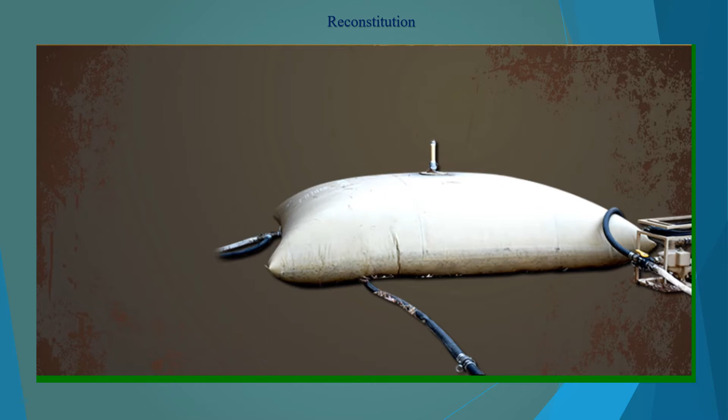When the ROWPU is going to be shut down for 72 hours or placed into storage, you will have to follow the steps listed in Work Package 9 of the technical order. The first step is to create at least 2,000 gallons of dechlorinated product water and store it in a bladder. Do this by turning off the chlorine feed pump and continue normal operations until you have enough water, then perform a short-term shutdown.

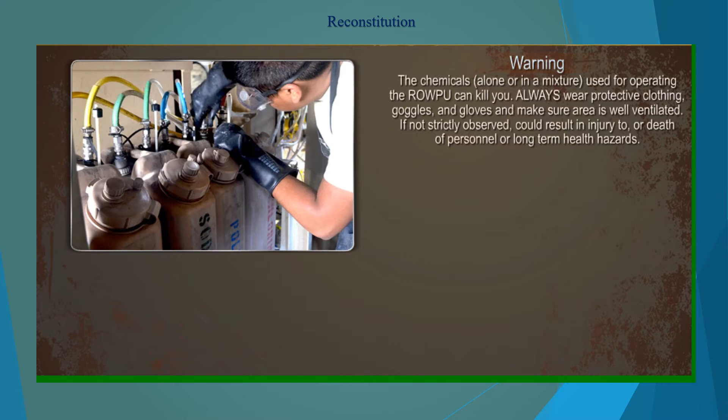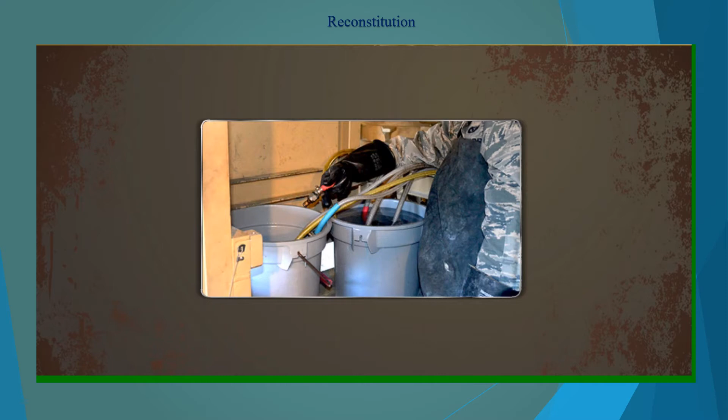Disconnect the suction feed and return lines from the chemical feed cans and remove the feed cans from the rack. Dispose of the excess chemicals in accordance with unit directives. Fill a pail with clean water and place it on the rack. Place the suction hoses into the pail. Place the return hoses into an empty pail on the rack.

Turn all run-prime valves to prime. Depress the chemical feed start button and adjust the stroke and speed to maximum. When the pumps are primed, switch the valves from prime to run and run for 5 minutes. This removes all the chemicals from the hoses, valves, and pumps.

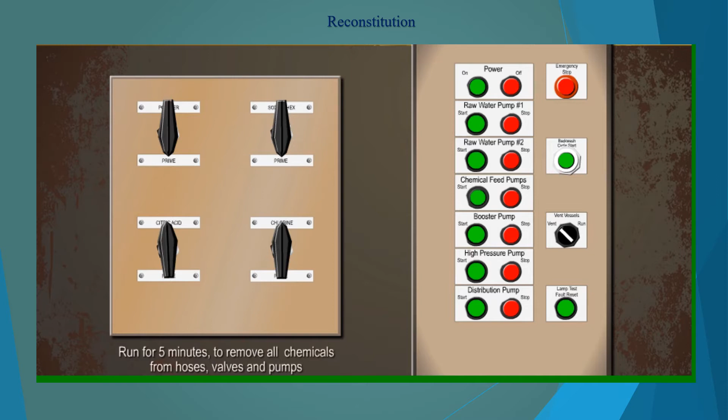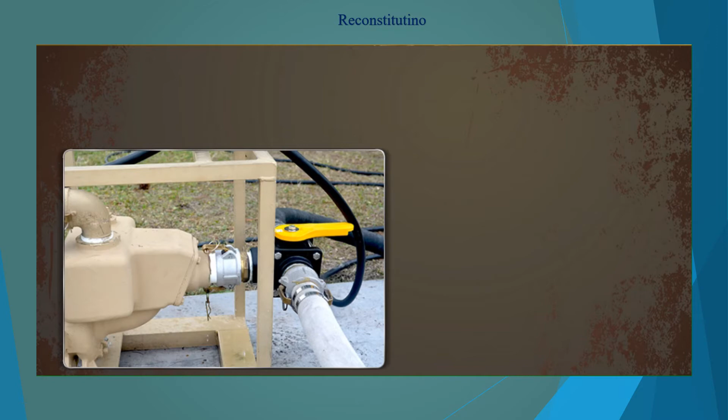Switch the valves to prime, remove the suction lines from the pail, and run the pumps until no water is discharged from the return lines. Turn off the chemical feed pumps and install the dust plugs and caps on the feed cans and hoses. Secure the chemical feed cans back in the rack.

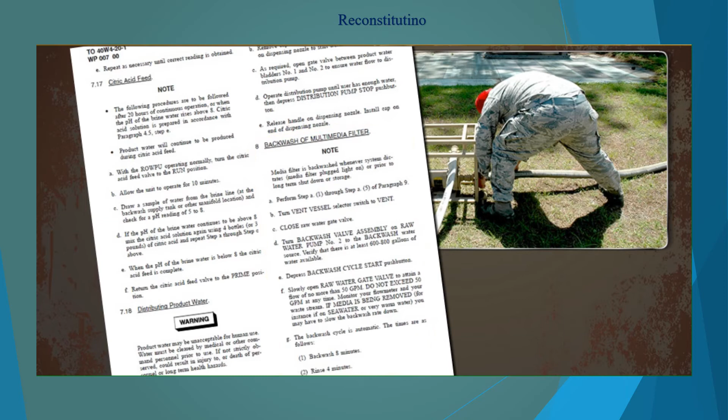Reconnect the intake hoses from the raw water pump and backwash water supply to the dechlorinated product water storage bladder. Perform a backwash of the multimedia filter following the steps listed in paragraph 8 of Work Package 7. Once the backwash cycle is finished, return the ROWPU to normal operations.

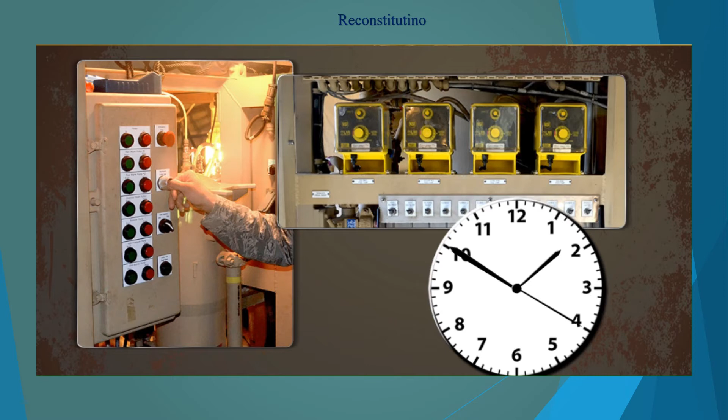With one exception, you will not turn on the chemical feed pumps. Using the dechlorinated product water, run the ROWPU for 10 minutes. Periodically during this time, open the 12 vent valves to clear the lines.

Perform a short-term shutdown and open all the drain valves. Once you have drained the ROWPU, start the booster pump and allow it to run for only 5 seconds to remove any water trapped in the pump casing.

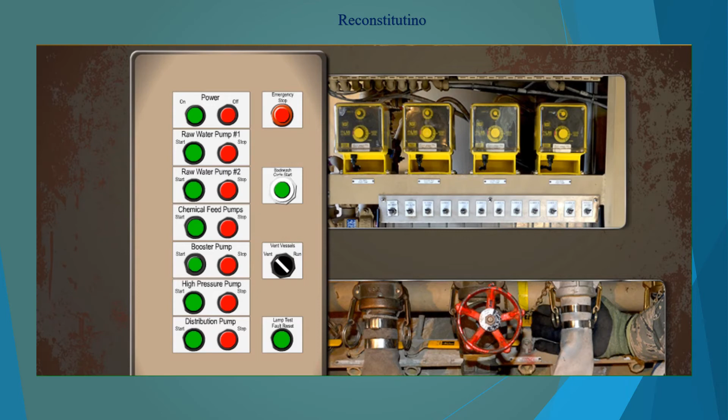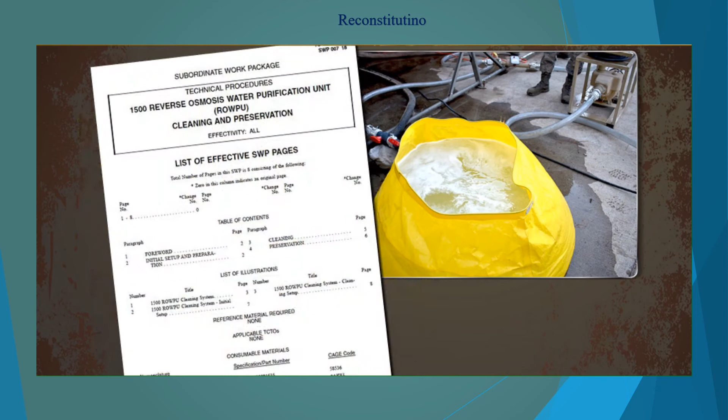If you are going to place the ROWPU into long-term storage, you should clean and preserve the RO elements in accordance with Sub-Work Package 7-18. Once you have preserved the RO elements, perform a long-term shutdown.

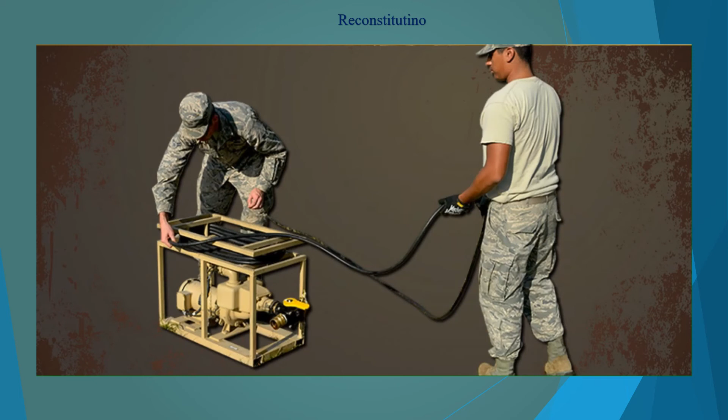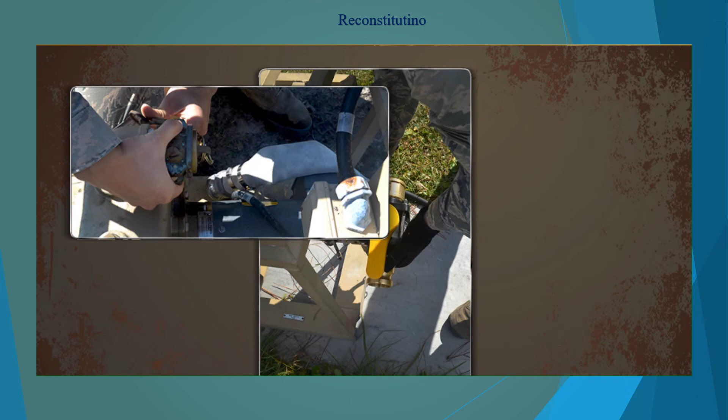Disconnect the raw water pumps from the ROWPU. Install the power cable cap and wrap the power cords around the pumps. Open the pump's drain valves and remove the backwash valve assembly. Next, remove all the hoses and install the plugs on the suction and discharge couplings.

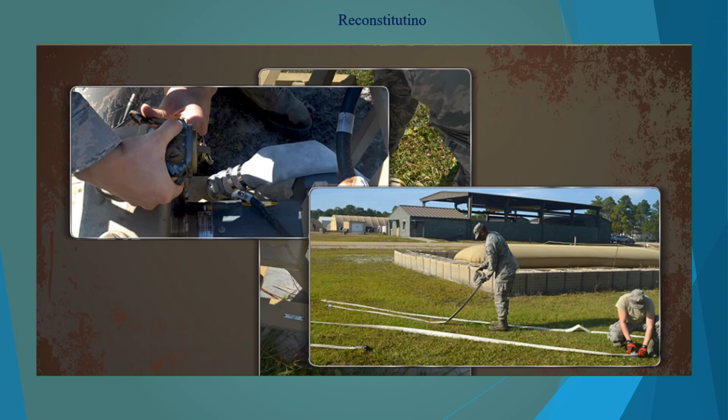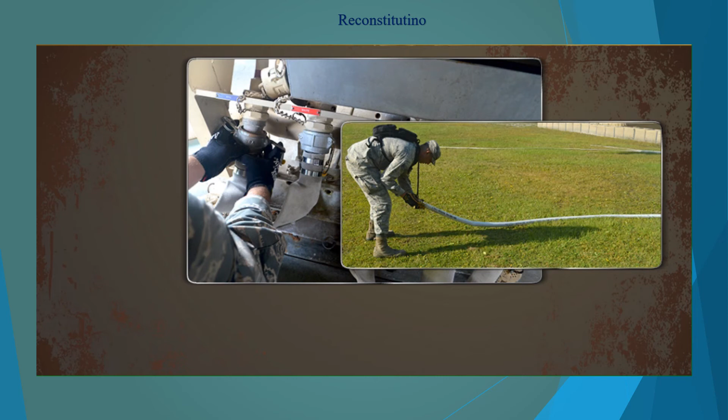Finally, drain and air dry the hoses. Once they are dry, install the caps on the male and female ends and roll them up. Disconnect the raw water, waste, brine, product, and vent vessel hoses. Drain them, let them air dry, install the caps on the male and female ends, and roll them up.

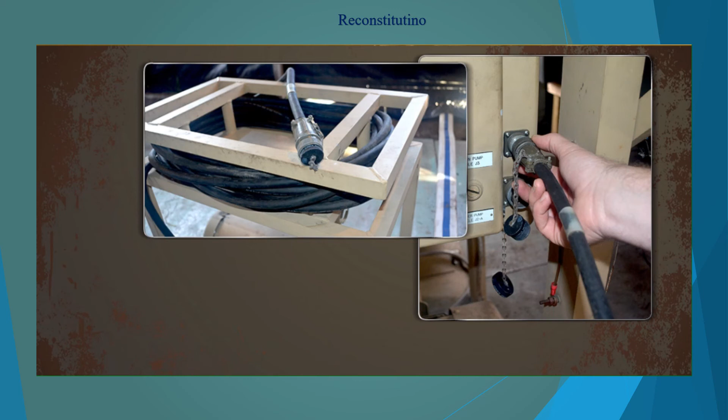Disconnect the distribution pump from the ROWPU, install the power cable cap, and wrap the power cords around the pump. Next, remove all the hoses, drain, and air dry them. Once they are dry, install the caps on the male and female ends and roll them up.

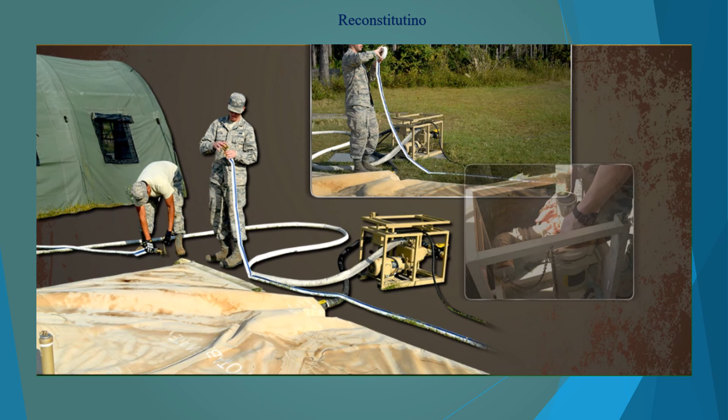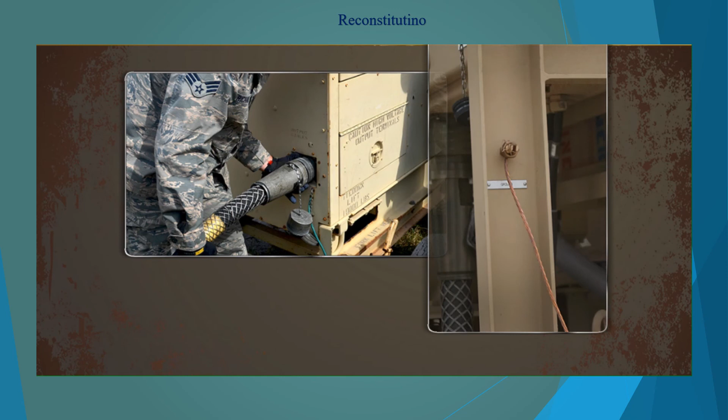Tip the distribution pump and allow the water to drain. Once drained, install the cap and plug on the pump inlet and outlet. Disconnect the 200 amp cable from the ROWPU and generator or SDC. Next, remove the ground strap from the ROWPU frame and ground rod. Finally, remove the ground rod from the earth.

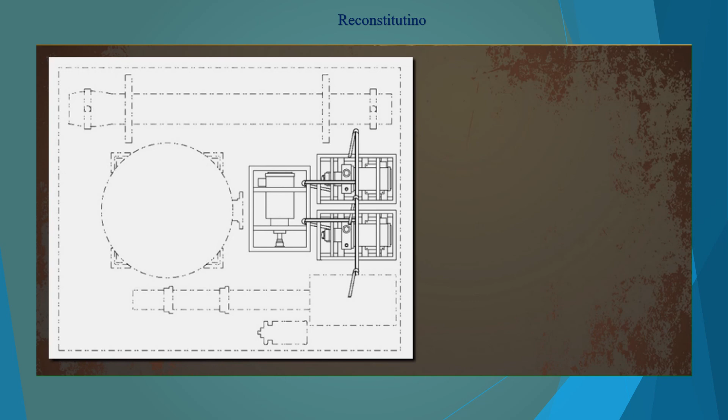Refer to the Load Plan 1 and Work Package 9 of the Technical Order or the BEAR Packing Plan for the packing procedures. Load the pumps inside the ROWPU as shown and secure them to the provided braces. Store all the hoses and other accessories on top of the ROWPU and secure with a cargo net and carabiners.